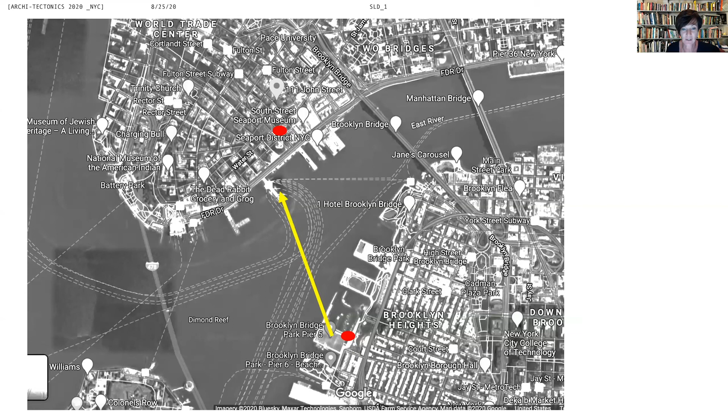But we are finding ourselves in very strange times. Warmer temperatures increase the risk of desertification, and they also cause greater risks of droughts, followed by resulting scarcity of water. The global land and ocean surface temperature for May 2020 tied with 2016 as the highest in 141 years. Temperature extremes will affect sectors such as agriculture, tourism, and energy production. Cities can face new challenges for supplying water and other basic resources.

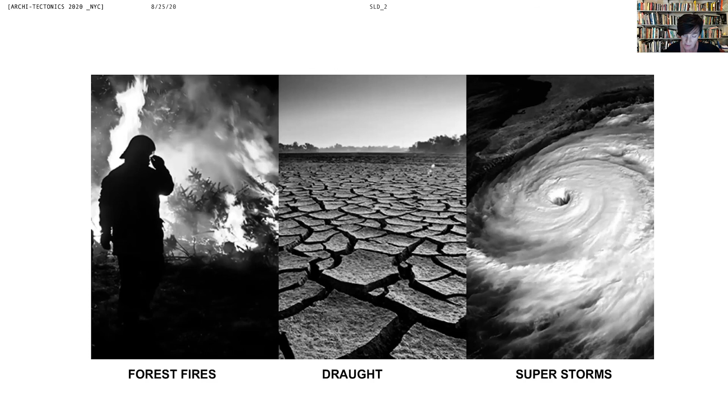As of 2019, more than 141 million Americans live in places with unhealthy levels of air pollution, according to the American Lung Association's 2019 State of the Air report. Other harmful types of pollution are, of course, ground-level ozone. This is what we call the Anthropocene, caused by us.

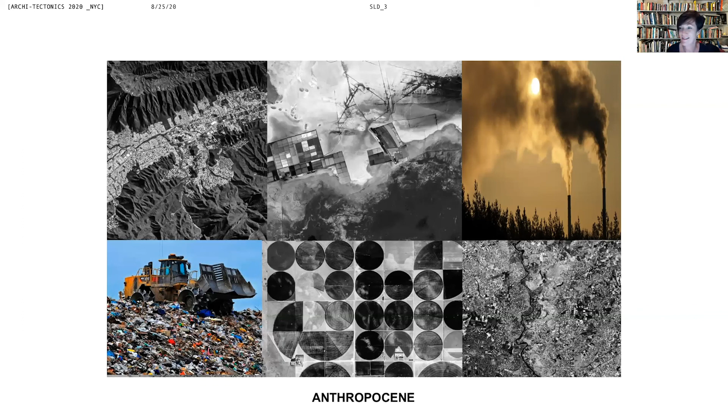And of course, as we all know, and I know you're just entering level 3 or 4 for COVID, it was really a strange situation that in the northeastern US we actually had a 30% reduction in pollution in March. Sadly, all scientists are warning that this is not an ongoing trend, and as we know from China, it's very quickly back to normal.

What I would like to show is very quickly some effects and research we've done in different buildings in order to get to the last 2 projects that are the ones I want to talk about. The first one is surface intelligence: smart skins that have passive solar energy, are energy saving, are usually prefabricated, and use renewable sources. The first building I discuss is 497 Greenwich Street, on the west side of Manhattan.

This was actually quite an amazing thing, to have your building show up in Google—obviously my first building. But what was really interesting here was that the research was focused on the wrapping of an existing 6-story warehouse.

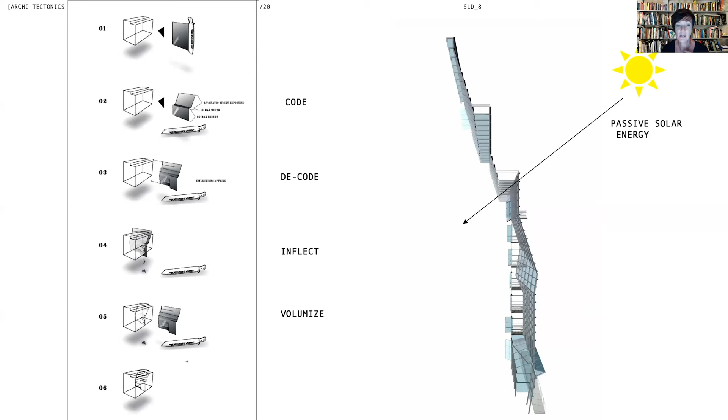The notion was to decode the building code, in the sense that we took the inclined plane of the building code and used the mathematical tool of intersection to inflect the surfaces on top of each other, causing a wave of glass rather than 2 different systems. So inflection caused volume and created a facade that was a connective membrane rather than a divisive wall.

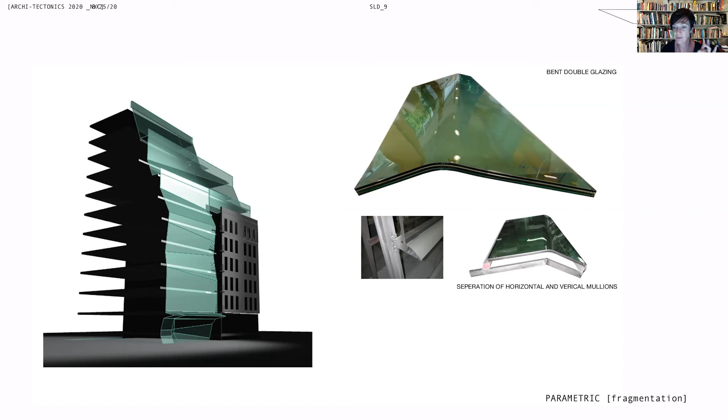We also took the chance of taking the folded glass—actually double glazed and folded—to also separate the horizontal and vertical mullions, creating bands of glass rather than a grid of glass. Curved annealed monolithic glass is made in gigantic ovens. Our producer was in Spain.

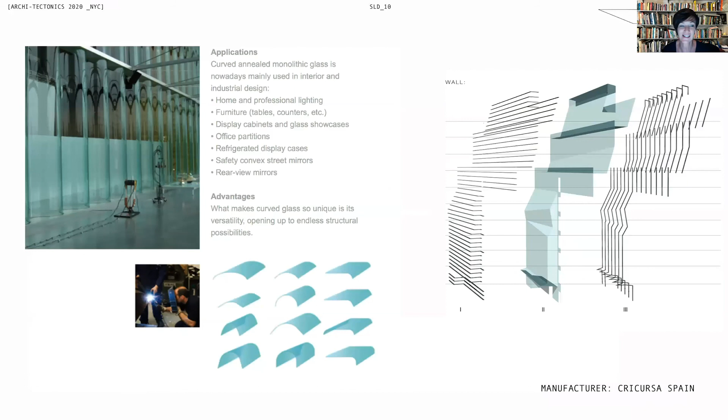You could say that this is one of the first kind of parametric facades that is completely designed in 3D and then communicated through all the manufacturers in a very fast, efficient way, to make sure that 3D models are used rather than 2D drawings.

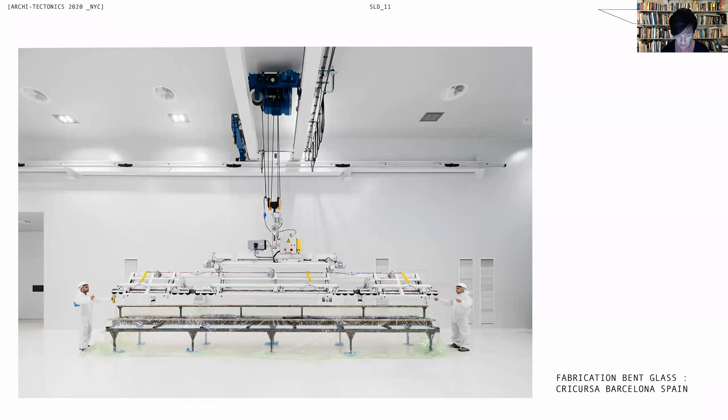The interest here is in an architecture conceived or invented from the smallest bit or atom of information—a seed—rather than a formal design methodology. Invention, as the originator or seed of the architectural object, occurs in the middle, not at the start of the design process, and not as the final outcome.

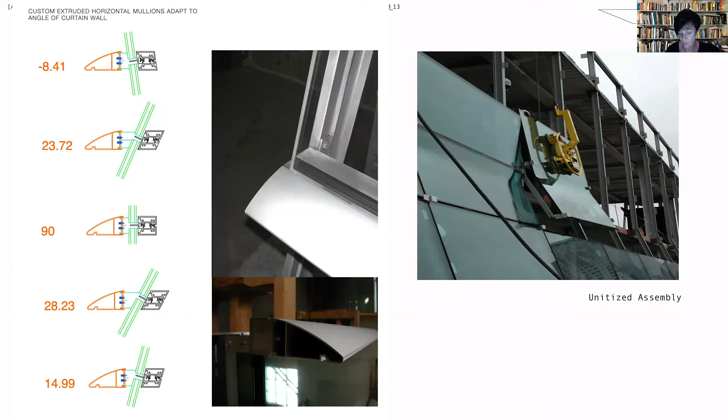It is rather in the prototyping phase, like you see here, that serves as a discovery process, instigating the growing of a design rather than the composition or the master plan. Search for universal beauty is not the goal; rather, achieving character, identity, and the optimized is the preferred outcome.

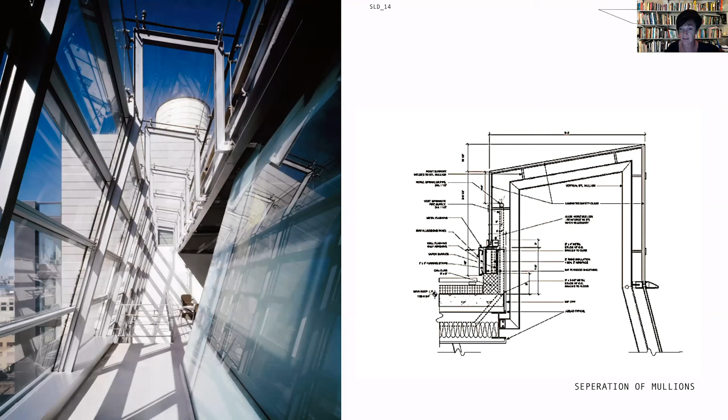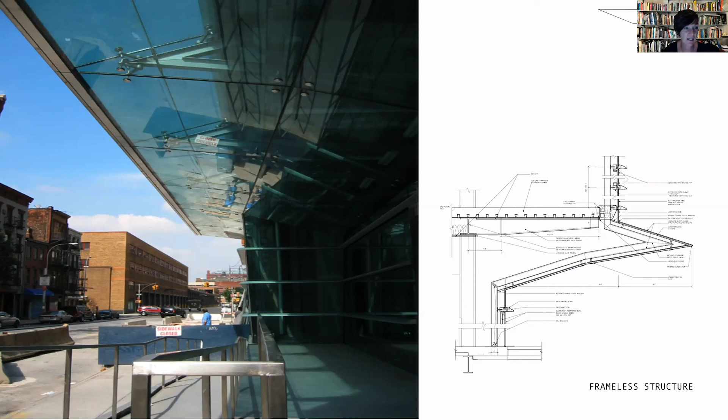Here you see also, for us it was really important that the glass was volumized to the major degree at the ends of the curtain wall. So here was the top of the curtain wall, here is the bottom, the street facade, custom varying mullions, and the glass is merely suspended on points here.

Really important was that it has passive solar energy, natural ventilation, and that the building uses a minimal amount of energy, but is really warm in the winter, and in the summer there's a smart solar film in the glass that stops the overheating. The crease, as you can see between the two, is mediated by small prefab concrete balconies that create a division but also a connection.

The second building I want to show is one we did very close to the other, both in the south and southwest of Manhattan, close to Soho. This is Tribeca.

Here the idea was really to look at a landmark in a completely different way, not to copy old buildings, but to look at optimization of the traditional construction, material ecologies, and proportional systems.

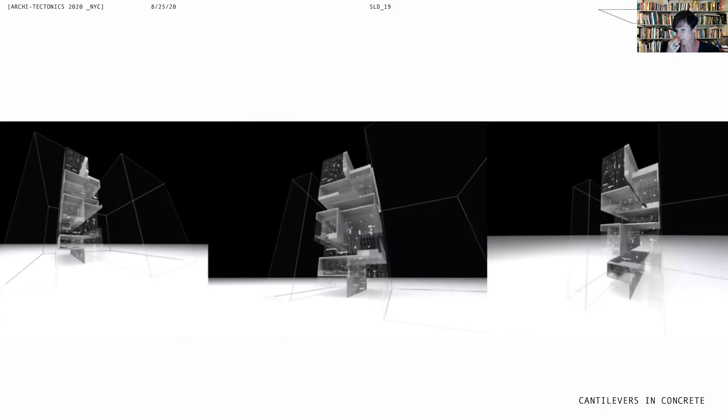The building is completely floating from its core and is poured in place concrete. Hence, it allows for really deep cantilevers and double height spaces, optimizing the south garden facade, with 12 feet balconies or sunrooms, allowing for shade in the bedrooms but a huge amount of light in the living spaces. It's a completely non-standard building in the sense that there is just 7 villas in the whole building.

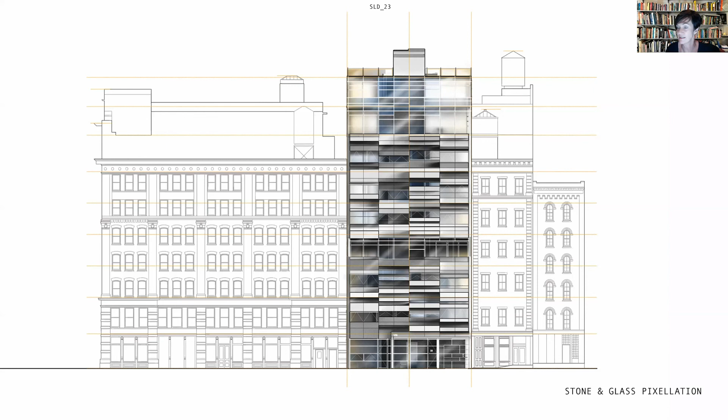The front facade is a pixelation of stone, translucent stone, glass, and translucent glass. It actually negotiates the rhythm of the two neighbors, allowing for proportional jumps, but seeing the building as a three-dimensional grid of pixels.

So the pixels are really cantilevered aluminum boxes with translucent stone in them. Again, it has openable glazing, and again, the prototyping was really important.

The seed or kernel here was the idea of using translucent stone as an unfinished material on the outside. It was the first time, I think, a building actually used translucent stone on the outside. It's done a lot in alabaster inside walls, but not so much on the outside.

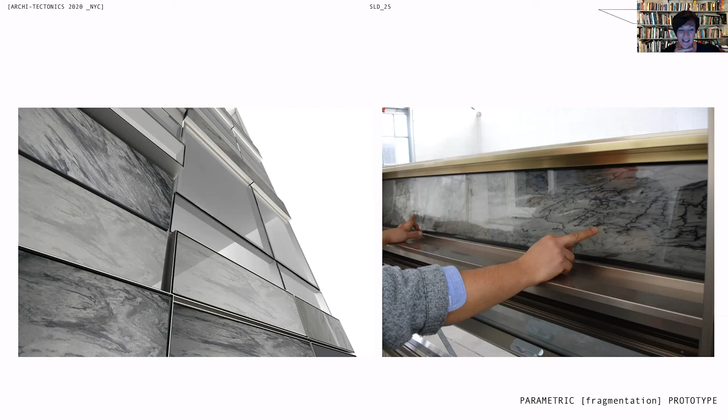So here you see the prototype in Italy. It was very lucky that the factory was actually in Florence. And then we found that the stone we needed was in Portugal, so we had to go to this quarry.

If you look at the size of these, they look like toys, but these are actually the biggest possible trucks, so you can imagine you're probably as high as one of the wheels. These quarries are absolutely enormous, and the way you try to figure out the color of the stone is by choosing these gigantic blocks of 7 by 7 by 7 feet, and trying to figure out which one will be the right one.

Then you get this really interesting pixelation that not only works on the outside as a glowing facade, but on the inside actually starts to pixelize the buildings across the street also. So there's a great varying degree of optimization of private spaces, in the sense that the translucent stone and translucent glass really allow for a very soft boundary towards other spaces.

And of course, on the top of the building, it gets greener and greener as you go up.

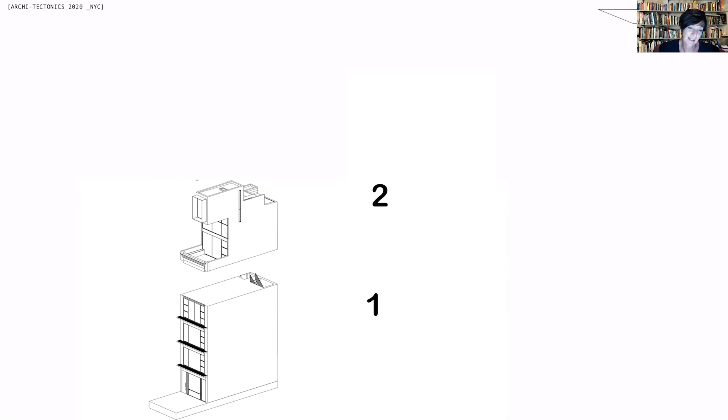We recently finished the townhouse that Don just mentioned, the 512 townhouse. It's an 8-story townhouse for one family. It's quite fun. What we realized is, when we looked at the existing building of 4 stories, our extension with all its setbacks for the city got to be almost as large. So we decided to introduce a 3rd building that is kind of an idealized building, a climate trellis.

Trellises are screens and escape all building code restrictions. So this trellis is very spacious and much larger than the building. We decided to keep the fire escape landings, as we said to the DOB, on the building. Behind the trellis there's a set of balconies where you can read, smoke, grow plants, whatever you want. But then the setbacks on top start to have much bigger spaces.

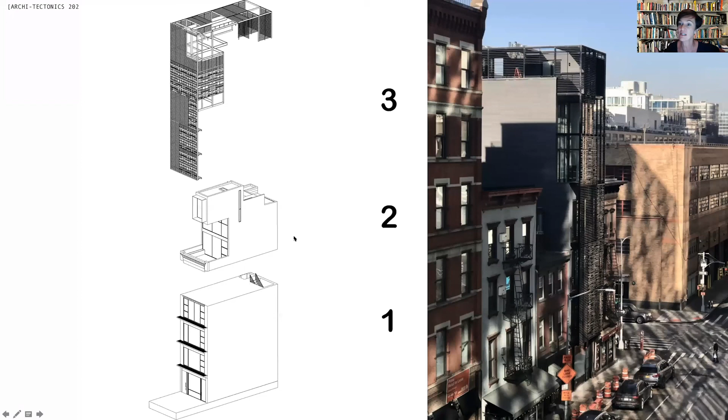The idea was really to create these exterior spaces as private spaces, and to allow this trellis to be openable, allowing for passive solar energy in the winter, but in the summer to cool the building and have a huge amount of privacy.

The prototyping phase was really fun. We decided we wanted the trellis to operate like a bird wing, so to optimize the fins almost like feathers on the wing. When the screens are closed, the panels are completely flat, but when you fold up these panels, they're kind of like fingers coming out of the facade, which I'll show here.

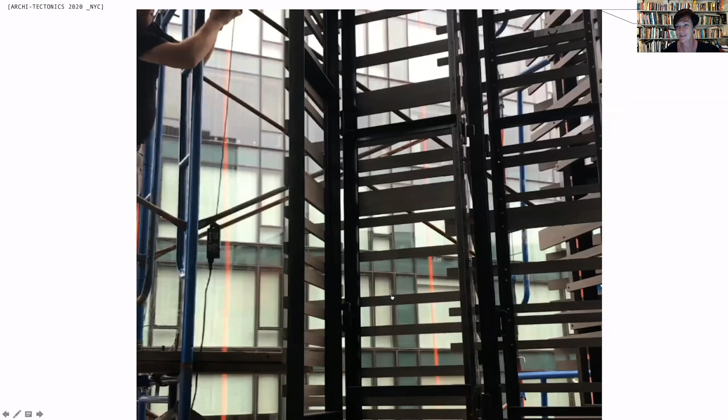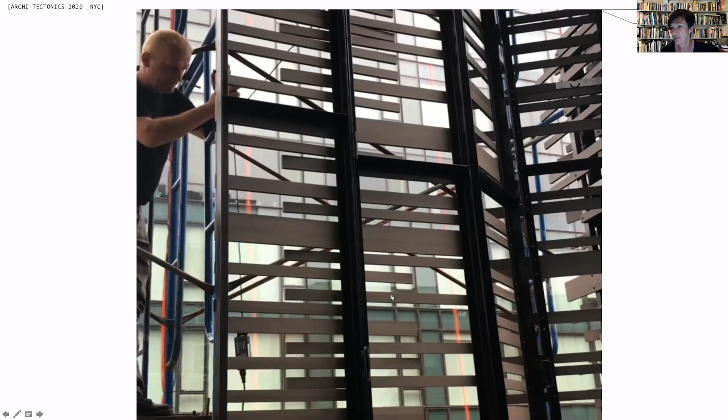This is us adding actuators to the facade to see whether certain parts could be automated and made smoother. In general it operates easily, but we thought in winter this would be easier for the client. Here you see how it actually operates.

The townhouse is quite small in floor plate, so essentially every floor has its own small program. The ground floor is a kid's room, the second floor is the kitchen and family room, the third is dining or whatever. So you keep going, every room has its own little program.

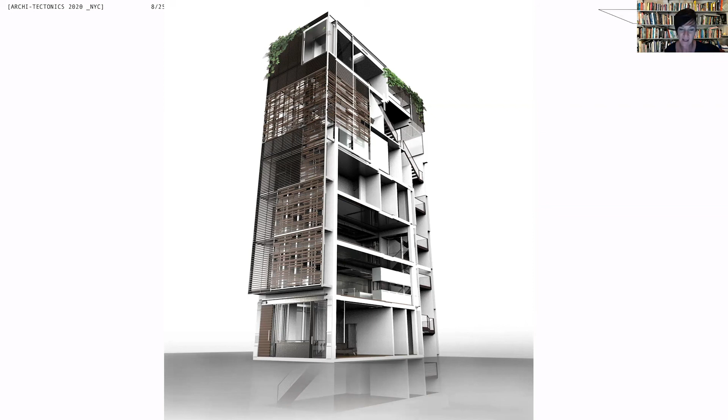But what was great is in this townhouse, because it is for one family, we were able to generate huge vertical cuts that are really connective in nature and allow for the facade to really be seen.

In the back of the building we cut a really long slot. There is an 8-story black stair and glass elevator that catch the south light. So although the building is enclosed on three sides, you have in the back of the building suddenly a huge amount of light, and there's also a skylight on top of this stair, and then you get the trellis that creates this green kind of screen.

But then on the top—oops, sorry. On the top you get—oh, this is giving me... okay, sorry guys, it's hiccuping. Let's see whether it wants to.

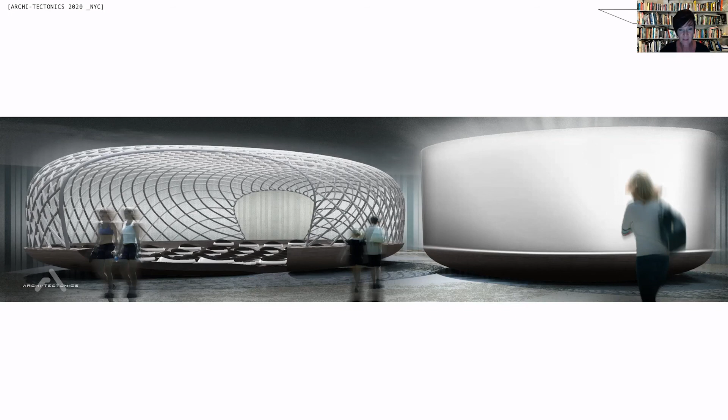And then we developed seating units and optimized the space to see how we could fit as many people in this space while still feeling comfortable.

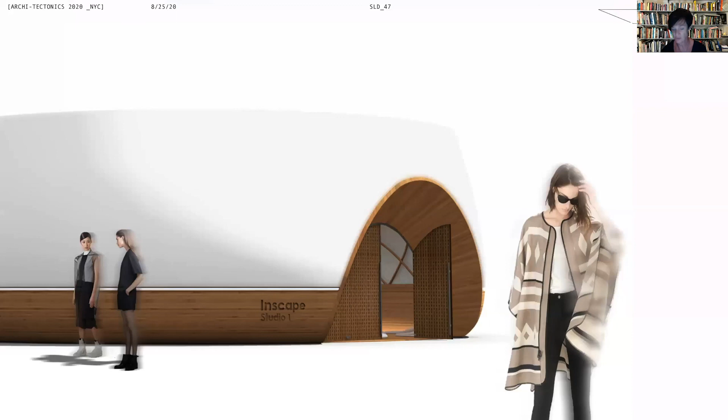And then we started looking at portals and how to work with this space that is kind of essentially a set of strange massive objects, or protobodies as we call them.

Essentially, what was really important about the dome space inside is that the ellipsoids basically have to be tested on sort of an optimization. They're synclastic domes, elliptic paraboloids, and the density of the material and the spacing of the grid was really, really important for us to figure out exactly.

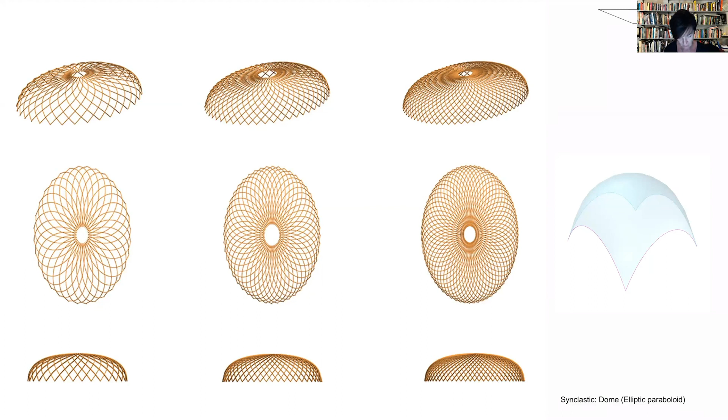A synclastic dome has identical curves, and both dimensions are curving obviously in the same direction. In this orientation, the dome is also under compression everywhere, which is really important for us to be able to make this self-supporting. Huge pressure was on the bottom frame holding the dome in place.

The real scale mock-up was needed after extensive parametric modeling and computational strength testing. In collaboration with the ARIA group in California, who is essentially an expert in car design, advanced manufacturing, and rapid prototyping, the grid shell prototype was further detailed and the necessary fastening methods developed.

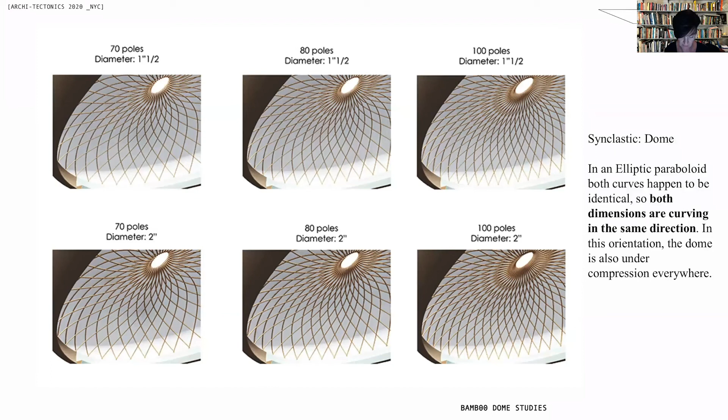Here you see essentially there was a no-judgment seating policy. You can imagine a meditator is not necessarily a yogi, so there was a possibility to sit on the ring of the dome as a normal seat. There was another second version where you could sit against the seat but on the floor, or if you're more experienced, to sit on the individual units on the floor.

The grid shell had an open oculus on the top and a low horizon of light on the bottom. It was at once the most simple and highly engineered space we have ever made.

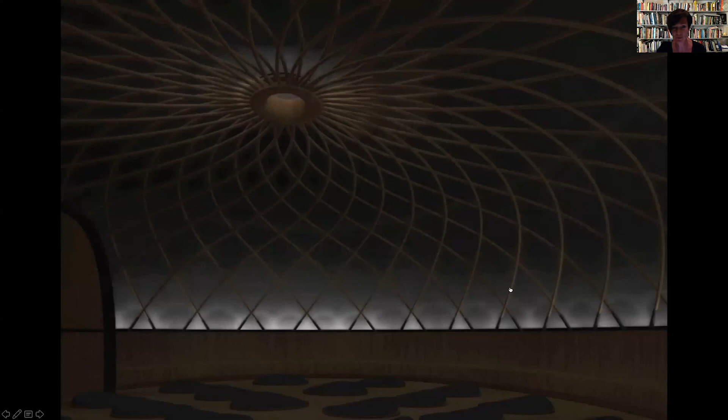It's a huge contrast. So actually what for us was most important is if you came into the space, the lighting is all on. But then as the meditation starts, the lighting goes down to this low horizon that stays on as a soft glimmer to give you kind of a stable line to focus on if you have problems meditating for a longer time.

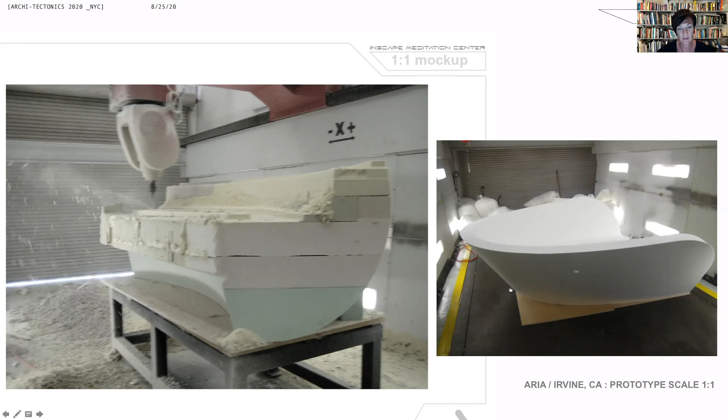The prototype was made with the ARIA group in Irvine. Actually a prototype made 1-to-1, which is not usual, but since they have a gigantic factory and robots, we decided to mill it in real scale. It's quite beautiful if you see the inside of the outside here. Normally you don't actually see this shape, but this is only the inside shape here.

What was quite amazing was that at the client's insistence, the whole team meditated in the factory's prototype, including the manufacturers. Quite the experience, you can imagine.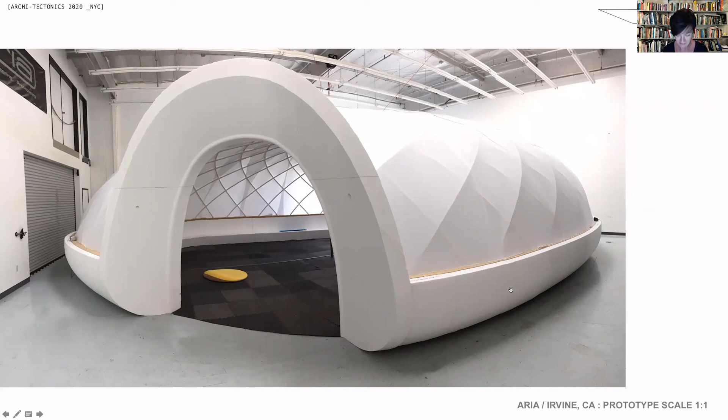The other thing that was quite important was it's a proto space in Manhattan to be rolled out worldwide. The prefabrication was the only way to figure out how to make local manufacturing possible and not have to ship too far.

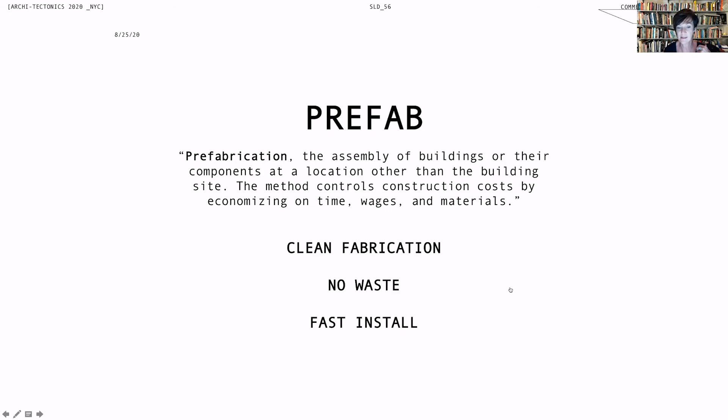As you all know, prefabrication is the way you can really control construction costs, economize time, wages and materials, but it's also clean, has no waste, and has a fast installation time, which for commercial spaces is really important.

Here we tested with the prefab people quite a few more connection details to get the force of the dome. As I said, the paraboloid has a huge amount of force that it wants to push out as the bamboo rods are bent. So as you can see here, there's actually a very deep connection point for the rods.

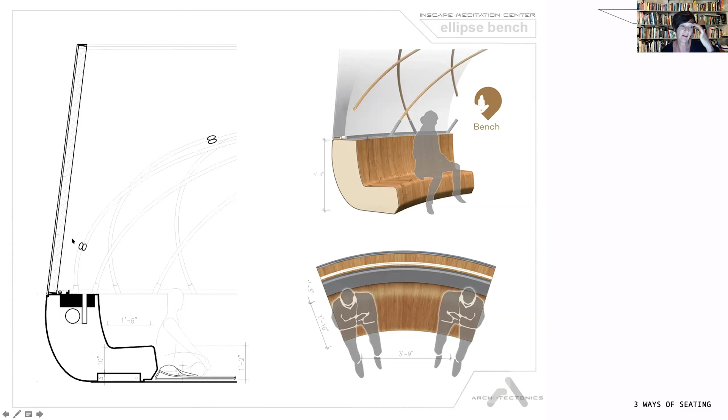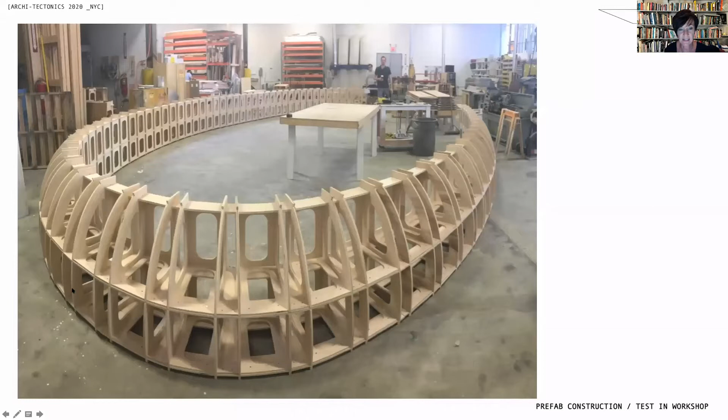There is also in the benches a highly precise air conditioning system that pushes air out behind the dome grid, the grid shell, and allows for lighting behind it. So the idea is really that this prefabricated frame holds all the technology that has to do with cooling and lighting.

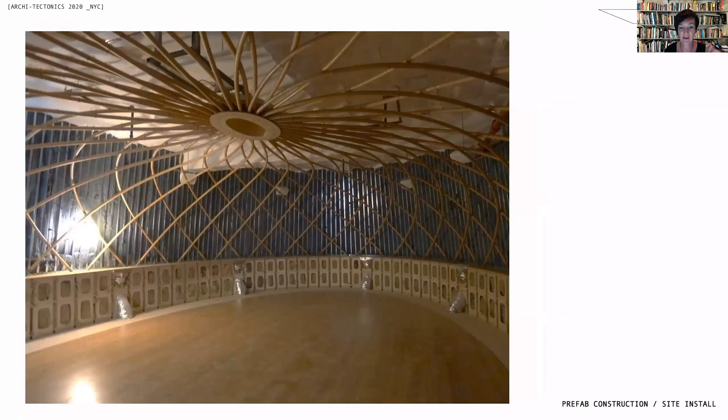Whereas the dome itself, that has a huge canvas sail on it, hides micro speakers that were distributed evenly.

These are massive shapes. The idea was really that there is an option to make kind of a new beauty, or maybe almost approximate the ugly, by creating things that are slightly uncomfortable, out of scale, and are an effect that can be used as an opportune moment to create unusual effects, oppressive moments.

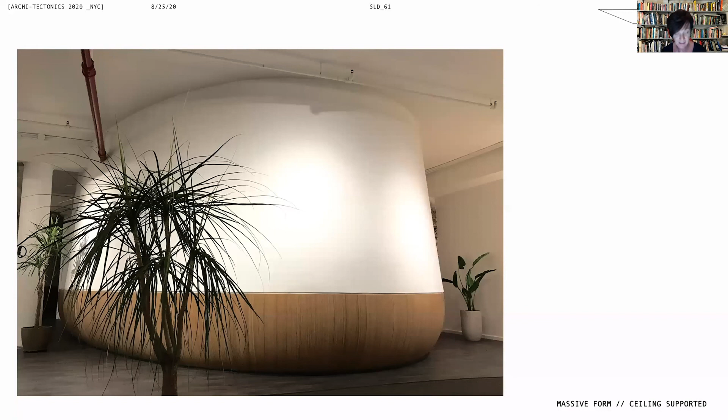In a project like Inscape, its massiveness is in relation to the space it occupies. The meditation dome appears immense as it is squashed into the limited boundaries of the ground floor space, and is vast in its expression, creating a sense of wonder and strange beauty, if not unease.

It's not unlike how Edmund Burke describes the sublime. The sublime for him is our strongest passion, and it's grounded in terror. I wouldn't say this is terrifying, but it's still a strange unease. It is not exclusively an unpleasant emotion, for danger or pain in certain circumstances gives us delight.

Inscape, with its rather unusual clumsy proportions, approximates this feeling of danger, but also of wonder, and often the visitor's curiosity wins. Once inside the dome, pure beauty takes over. The dome, with its intricate flower-like pattern, glows, and surround sound holds the visitors in a soft embrace.

The proto-body is also extended to the retail system, where we made self-supporting shelves that, because of a triangular shape, lean against the wall and support themselves.

Basically, a startup company, Inscape, we had no idea whether they needed retail or not. So the idea was to develop a system of bamboo shelves that could be both a sound baffle or an art piece if not needed.

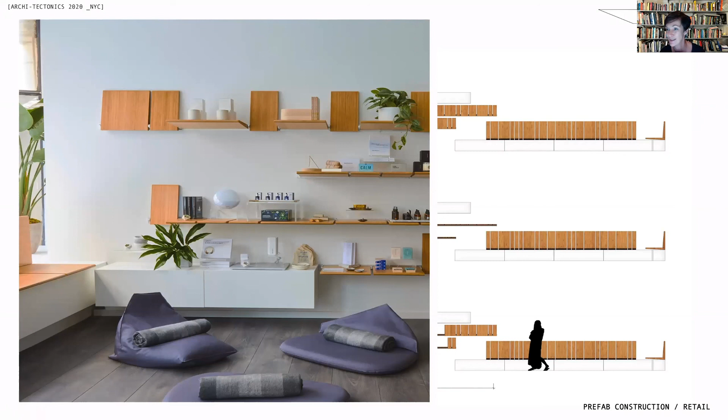But in the end, there was actually a huge amount of retail, and retail became one of the major sources of income, especially right now with COVID. As you can imagine, not many people want to sit and breathe in a space together.

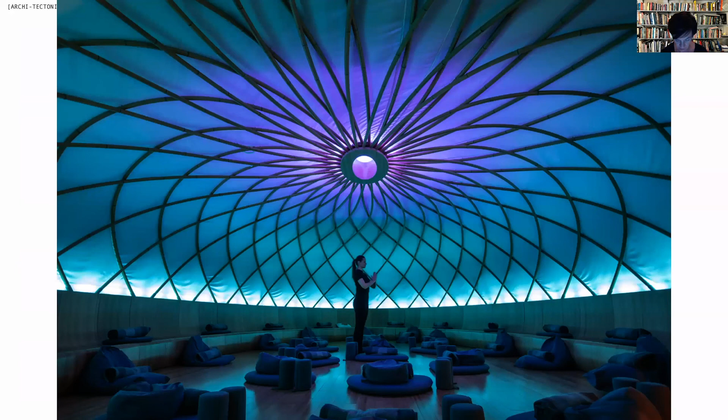Here you start to see how the dome is conceived as a grid shell, a radial structure that derives its strength from a double curvature and is constructed of a lattice. This free form and free span dome allows for a space to be free of any columns, and a minimal appearance was facilitated by thorough testing of strength and size of individual bamboo members.

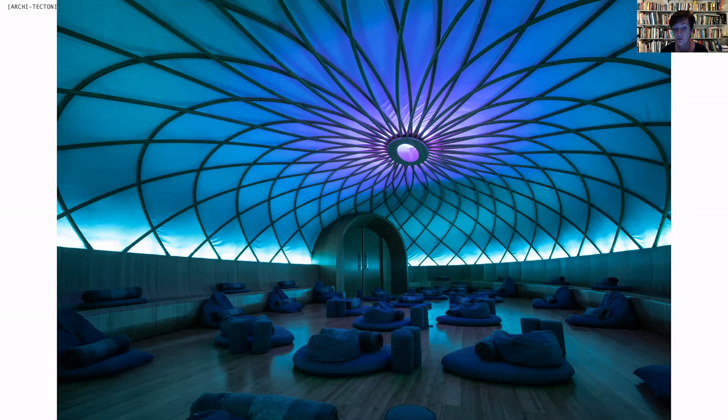It was also really important for us to create kind of an entry that was more of a tunnel-like space. And then here you can see the configuration from bench to free seating in the middle.

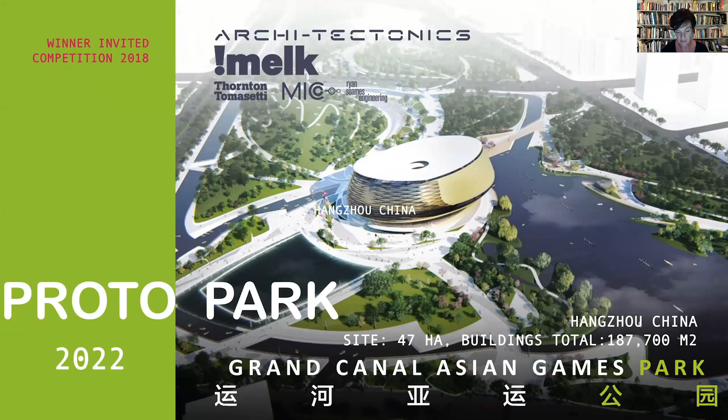Moving on to the Asian Games, which is actually a 116 acre park and 7 buildings. Asian Games are like our Olympics. We won this with an extensive team of very well-known developers and structural engineers.

We had a landscape architect called Melk. Engineers are Thornton Tomasetti, who are both in US and China. MIC is Mobility in Chain, a traffic and accessibility engineer. Ryan Soames was our MEP engineer, as both the park and the buildings are to be designed sustainable.

The park is a sponge city concept in China. It's basically wetlands, porous pavement, and really important to hold the existing river and recreate the wetlands. The buildings are all sustainable as well. The site was absolutely beautiful. It's not often that you actually find a park where you're creating a park, so this was really quite a surprise.

The idea was a sponge city. Our concept for the Asian Games Park and stadiums emerged from a unique combination of innovative design methodologies and local cultural heritage. By utilizing vernacular artifacts as seeds for our pragmatic formal investigations, we created a poetic, multi-layer design with advanced construction technologies, nested within a beautiful park landscape.

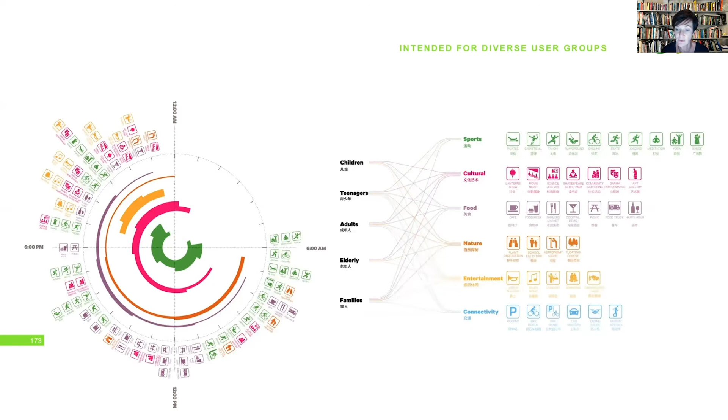Really important for us was that the Asian Games are essentially a few weeks, and we're creating a mile-long park with 7 buildings. So we focused very much on the Asian Games because you have rules and you need to follow them. But we also conceived the park as a green lung that had different groups of visitors at different times of the day with different requirements. So sports, cultural events, food, nature, entertainment and connectivity were all equally important.

We won this competition not because we followed the rules, but because we did not follow the rules. The competition had asked to put the 2 stadiums right along a road that divides the park in the middle. We decided when we were studying that made the parks into kind of the backyard of the stadiums. We proposed a completely different proposal: to put the stadiums as generators and activators in the park sections.

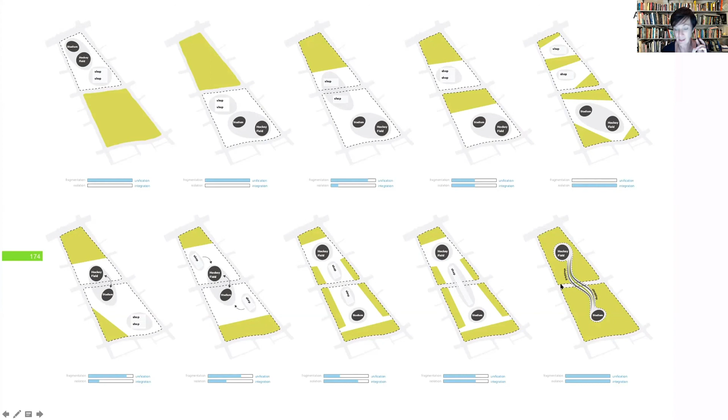Then connect it with what we call a valley village, which is essentially an open air shopping mall that connects under the road, but also under the river. Here you see that a little bit bigger.

You have the North Park, community and sports oriented mostly, and then the South Park, recreational and civic oriented. All the edges are very porous, so everyone can come in from every angle. Then there is a field hockey stadium, 5,000 seats, 14,000 square meters.

The Valley Village, as you can see here, goes under this river and under the road. So it's a very Dutch proposal in a way - we make basically the river into an aqueduct. The lower stadium is a table tennis stadium, also 5,000 seats and 34,000 square meters.

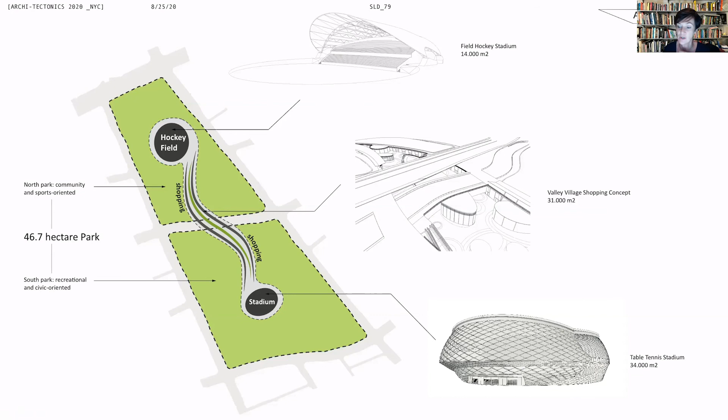This is the whole proposal in one jump. Here you see the road, the Valley Village going under, pedestrian bridges going over, the wetland area, the stadium as it sits nested into the topologies, and the field hockey stadium over here.

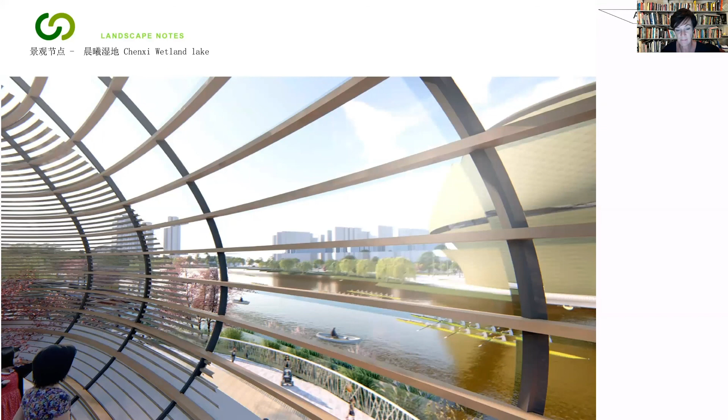The wetlands were really important. They have a huge problem because they are solidifying all the surfaces with roads and pavement, and stormwater at some point needs to go. So here we restored the original wetlands with local vegetation, and tea houses that look out over them as people are also using the wetlands for sports.

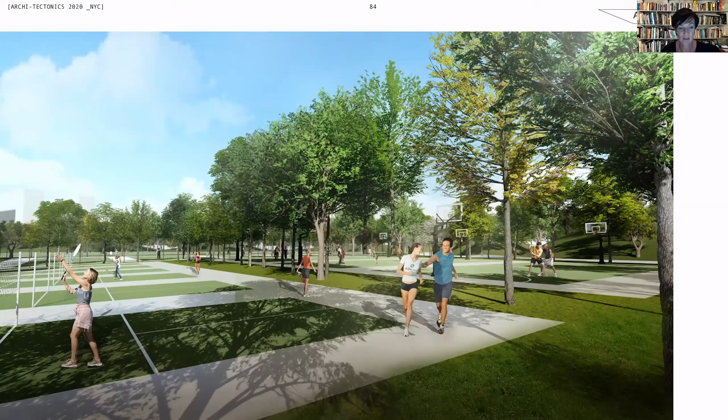We also had other things such as kids' playgrounds and other sports fields - tennis, field hockey, basketball fields all throughout the park. But maybe the interesting thing was to see this Valley Village that really connects the 2 stadiums.

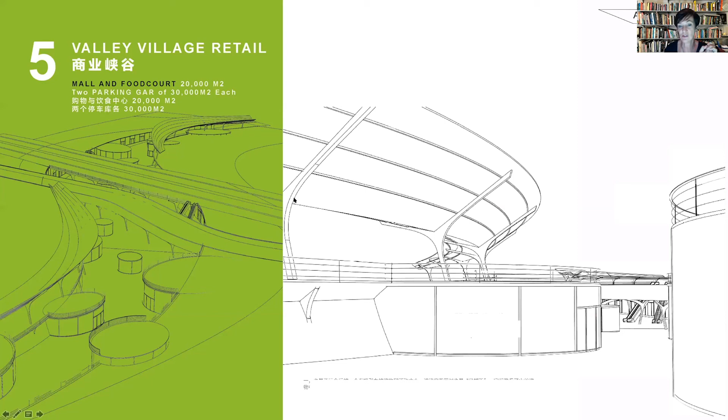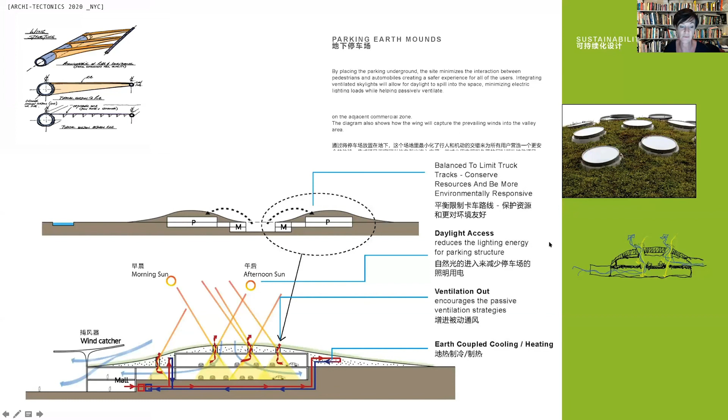When we looked at sustainable building, something that is underground is not necessarily sustainable. It needs a lot of air conditioning, artificial lighting. So we decided to make it an open space, but with green roofs and quite a bit of shading and solar screens. These shading devices are also solar paneled. We had a zero earth strategy, meaning whatever we excavated from making this valley, we used to create topography in the park, so you get a quite voluptuous park that really cradles the buildings inside it. We also created natural ventilation and natural heating and cooling systems for all the different systems.

Here you start to see how buildings really sit in the topography very nicely, the Valley Village from both sides, and then the stadium. And here on the road, looking back at the field hockey stadium. I'll go into the buildings in a second, but here you see the green roofs. The idea was really that the valley was a green valley, so nature dips down with it and allows for natural shading and cooling.

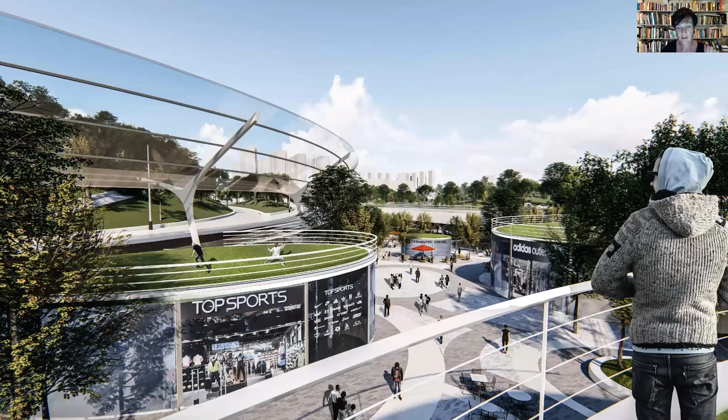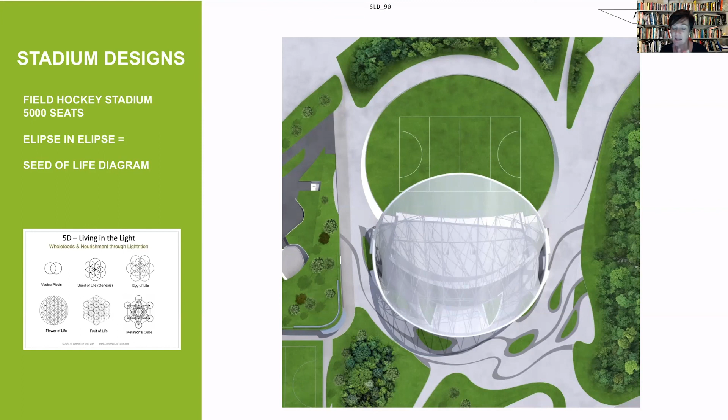The field hockey stadium was developed as two ellipses. Since hybridity, or the use after the games, was so important for us, we decided to design everything as a landscape feature. So although the fields are Olympic size or Asian Games size, the overall field was a recessed dip in the landscape, an ellipse the same size as the shading roof of the stadium, which is really kind of a vesica piscis, or a seed of life as they call it. It's a very ancient system used by Euclid, by Da Vinci, and also used in more symbolic ways, such as by the Freemasons. We thought this was interesting to play around with these double meanings and the idea of seeds to indicate the double function of the building.

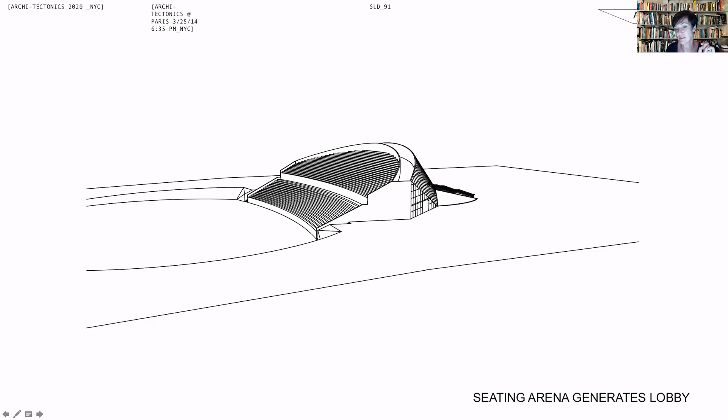So the design was very simple. We designed a stadium in solid concrete. As you can see, the field is really recessed, actually 5 meters deep here. The space under the seating is the direct consequence, with a glass curved facade that gets covered by this 125 meter free-span wing, a diaphanous wing of translucent fabric whose only function is to shade the viewers from the sun. Here you can see the two trusses are completely free-span, buttressed with concrete abutments to hold them in space and catch the tension.

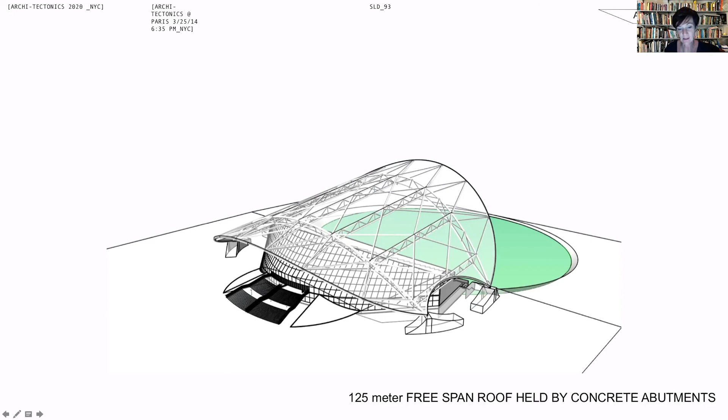The park folds up into the lobby, so the floor is moving up with the space. The idea again is to work with a steel and glass facade, but with bamboo beams, as you can see here. So beams and columns are bamboo, steel and glass facade, and then the seating. Here you see how the building is essentially created between the seating and the facade and this huge wing.

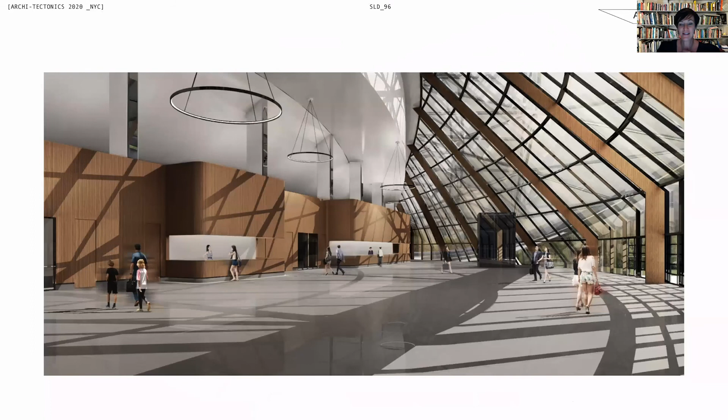Beautiful was that when I asked them to make the wing essentially just with two trusses and nothing else, they told me that the compression ring had to be very, very strong. I'll show you in a minute. This compression ring really holds the whole thing in tension, going from 1 meter diameter to 1.5 meters diameter -- 3 feet to 5 feet of steel.

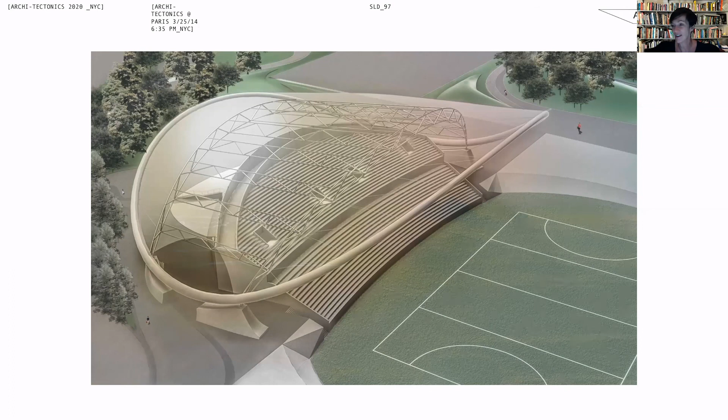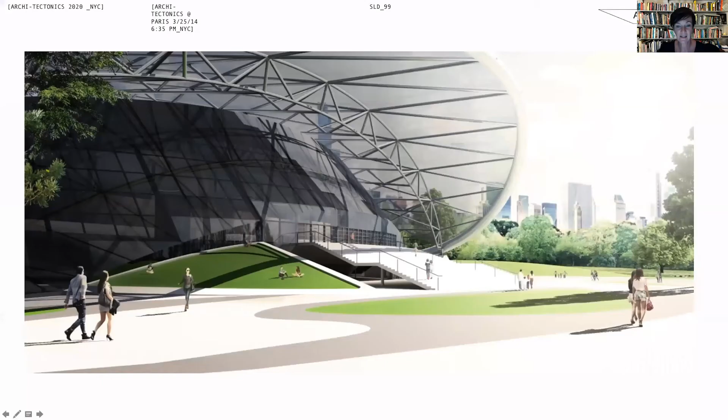Although that sounds like a lot, when we drew it parametrically in Rhino and in BIM, we realized the proportions were totally fine once this was 125 meters long. Here you see the lobby section, and then this is the wing as it sits. Here you see much more clearly how the field is really recessed in the park as a sculptural element, and how beautifully shaded the viewers are. The front park really moves up to the glass facade, this curved, basically single-curve facade with a cut to allow for the doors, and really big abutments. They're actually quite deep in the ground to keep the 25-meter steel in place.

And then the table tennis stadium is the main building really of the whole complex. Here we were very interested in the idea of intersection. As I said, we were really working between parametrics and local influences, trying to see how we could tie back to local culture. So I was fascinated by an object I found that had no real explanation for its existence, which is always interesting. It's called a Cong, or a Chong. It's found in graves, especially around Hangzhou, and it's an intersection of a circle and a square.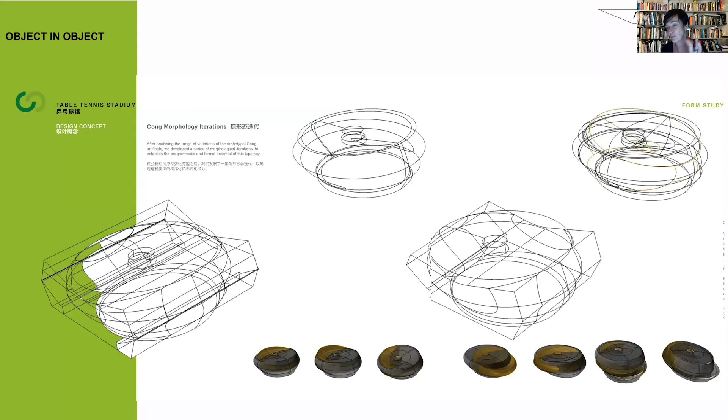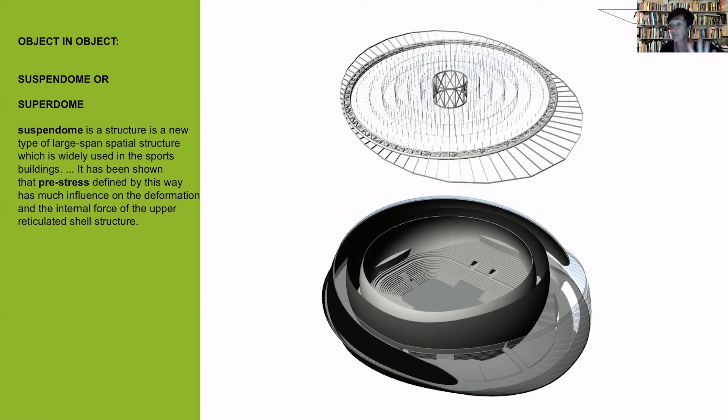And we have a suspendome on top. It's a new form of large span roof that, through a high level of depth in the middle, spans and pre-stresses itself, hence supports itself completely column-free. We asked the suspendome to sit on the inner dome, so the extension to the glass facade and outside facade is completely free. There's no weight on the facade whatsoever.

We started to think of the seating as a hybrid between arena sports seating and theater and concert seating. So we studied the shape of an arena, looked at a theater, made a hybrid, and created a very interesting way of seating that is much more fluid and soft, but could potentially also have a pop concert in the middle.

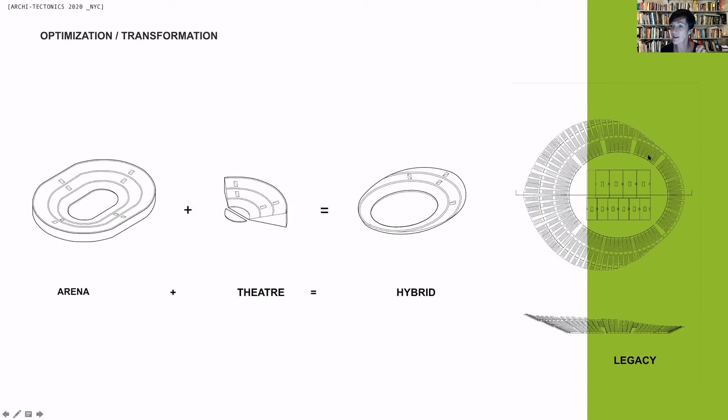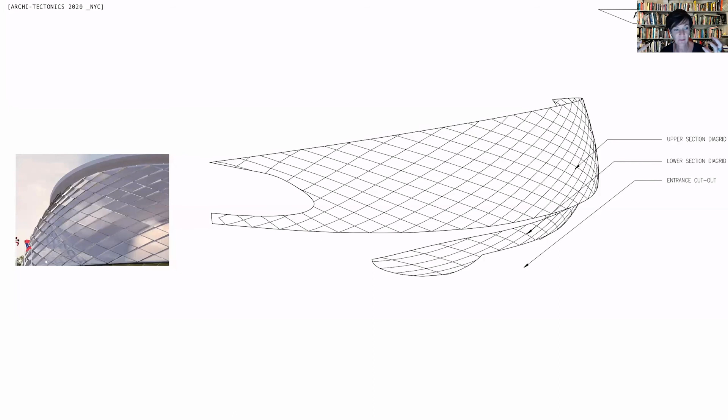The building, as the intersections in the facade form, is like a tiling of brass, as you can see, and a steel and glass diagrid. For us it was really important that the diagrid had a very large span so it feels like a structural diagrid. But we also felt it was important to keep the glass planar, with the idea of almost a fish scale skin that catches light in completely different ways.

The same facade consultant, Bill Logan from Israel Berger, helped us here. He made a set of very beautiful steel triangular fins that carry the glass and allow it to be shard-like, which means you get a stainless steel diagrid, then triangular shards, and then planar glass. Planar glass also reduces cost enormously.

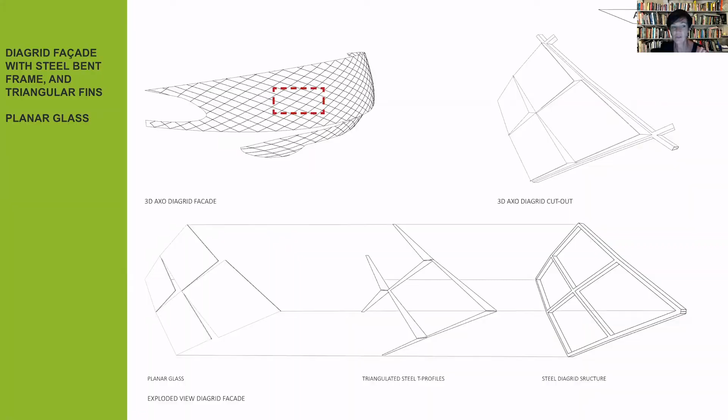Again, the buildings had to be sustainable. So together with Thornton Tomasetti, we studied passive and active strategies we could use. One was using rainwater catchment. We had openings just under the roof to evacuate hot air. It's funny about ping pong, you cannot have air conditioning because the ball is very light, so it cannot be disturbed. So the only thing we could air condition was the seats, under the seats of the viewers, and the lobbies. That's quite interesting.

And then the top of the arena has indirect lighting, so we had as much natural daylighting as possible.

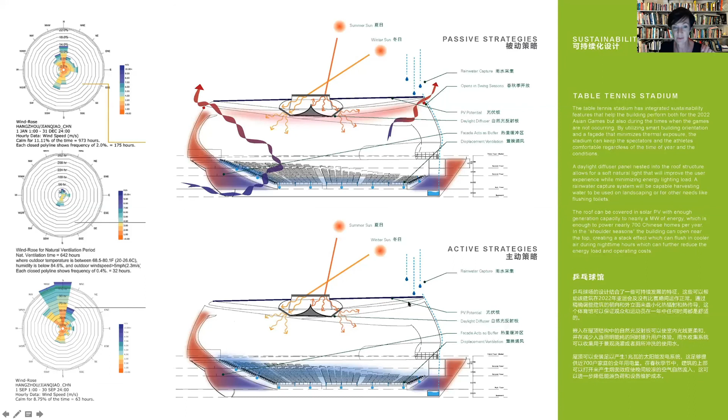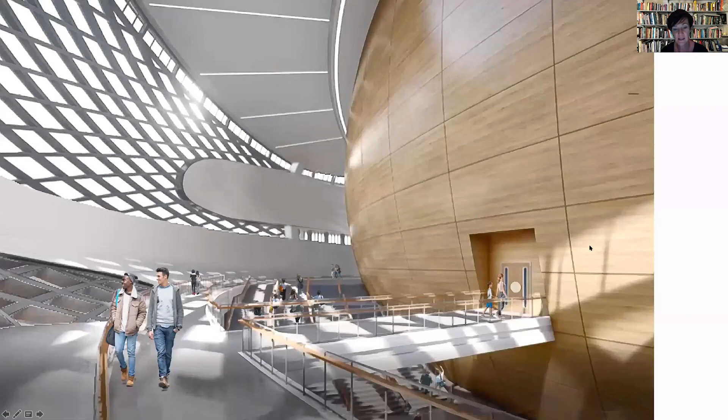Here you start to see the first BIM models of the interior, and the stadium as we created this hybrid seating model with the indirect lighting.

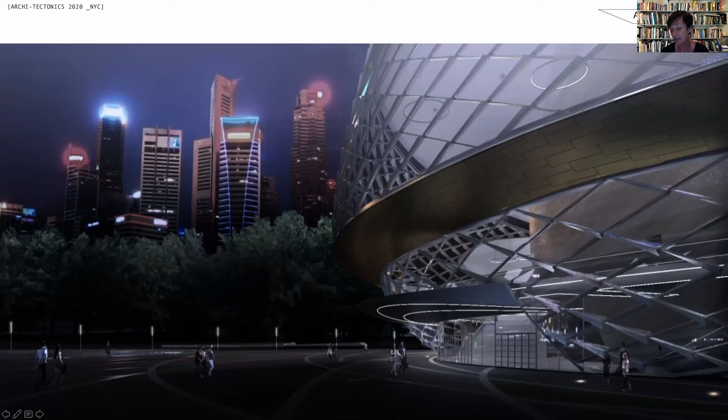It's quite beautiful at night because you start to see the shapes intersecting. The inner bowl is all bamboo, the outer, as I said, is this diagrid, and then the brass shingles.

Then one day after that meeting, we drove to the restaurant, and I'm looking sideways thinking, that looks really familiar. I realized our site already had a pretty construction wall with all our renderings on it, which was a pretty strange moment to see.

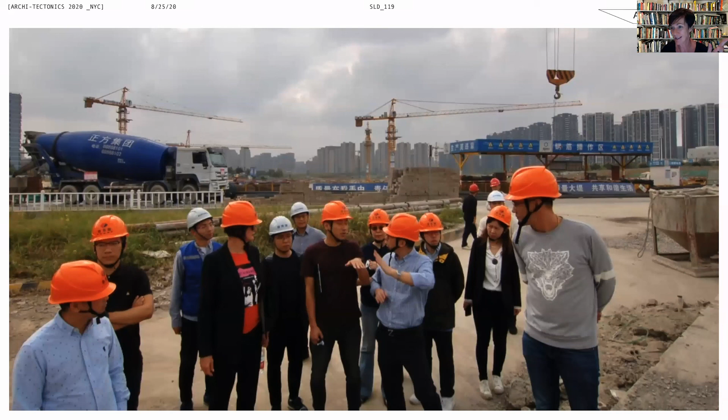And then a few months later, it goes in rapid speed here. We're on site looking at the construction. The site is so large that essentially we drive from building to building.

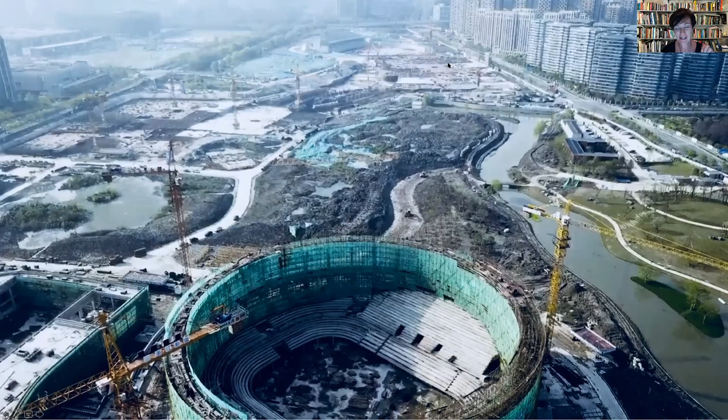This is the Valley Village and the hockey stadium, and this is more clear, the hockey stadium. So here you start to see that round wall going through the landscape, and the landscape goes up.

This is a visitor center I haven't talked much about, but it sits essentially under a green hill where you dip in, and there's a glass cone in the middle where you can also enter.

So this whole topography is slowly starting to happen, and they have poured for now all the seating. This is also poured, and you start to see the walls going up.

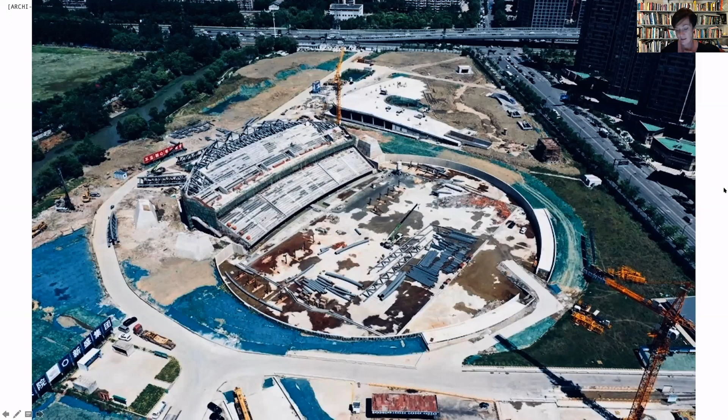What's really interesting is I asked them how they were going to do all these trees, and they told us that essentially they have a whole set of nurseries that have reserved enormous amounts of grown-up trees that, last minute, are going to be imported and put on all the topographical surfaces we've created.

And then here on this corner, into the table tennis stadium, there's a walkable lake with little tiny fountains. So it's very much for kids also to play in.

But this is the river flowing through here. So the river actually does come through.

And then this is a huge fitness center under this hill. Big parking garages on these sides. So this and this side of the Valley Village are flanked with parking, and also delivery areas and services like garbage removal and things like that.

And then here you see the stadium. And then all that is going to be explained much more specifically about why we think strange objects are really important, new solids and massive forms.

So yeah, again, for us it's really in the prototyping phase that we feel we find these strange objects. It is the moment where we allow material discoveries to happen, but also formal explorations. We test a lot of different scenarios, and we feel that in that phase is really where we conceive the project.